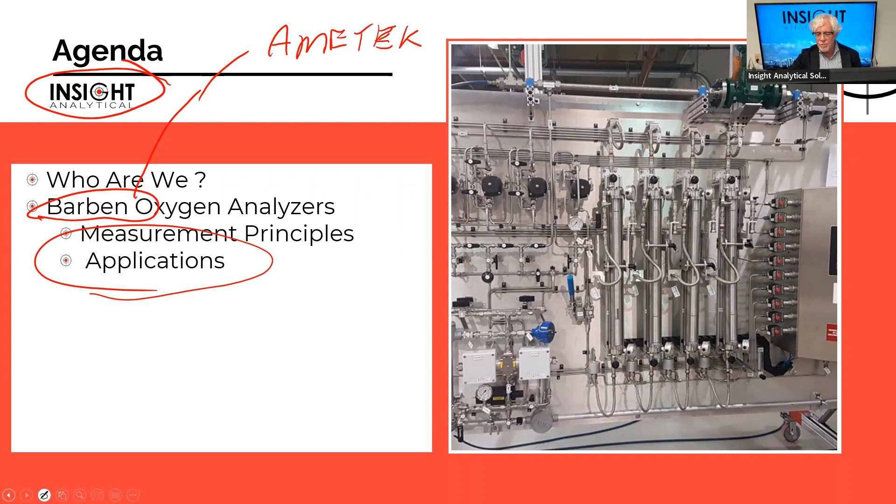Insight is a Calgary-based systems integrator and distributor. Our shop is in the northeast of Calgary. We co-locate with the local Swagelok distributorship, which leaves us a very large manufacturing floor available. We have about 20,000 square feet of accessible manufacturing space, lots of big doors, and a big 10-ton overhead crane. We can bring a full analyzer building in.

We are AB 83 compliant fabricators. For the Canadians here, AB 83 is important because it means we can manufacture systems that meet the required pressure vessel codes for installation and process applications. It's a specific set of regulations, kind of similar to the European pressure equipment directive. We've done projects with CRN for Alberta, British Columbia, Ontario, and Saskatchewan.

A lot of the people here have worked with this at other companies. We bring a lot of history, even though Insight's only been around since the start of 2016, late 2015. A lot of us have worked together for 10, 20, 30 years. So we've got a really strong team with good documentation resources, drafting and design, and engineering design resources. We have journeyman electricians, journeyman instrument people on staff, and full factory acceptance testing here in Calgary.

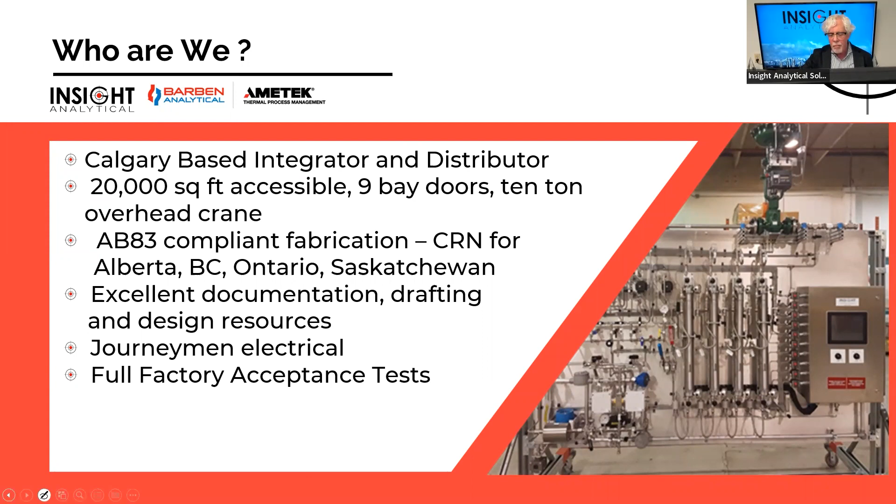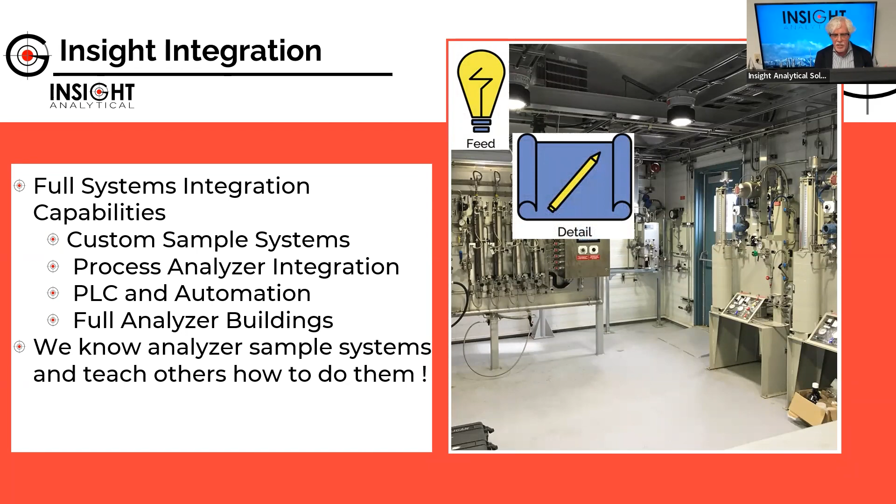From the systems integration side, we'll work on projects - no project too big or too small. We'll do things from just custom sample systems through full process analyzer integration. We'll add in any necessary PLCs and automation needed. We will do full analyzer buildings and shelters. We'll work on projects right from the front-end engineering design side, helping to specify the appropriate analyzers for a given application through to detail engineering, design, and fabrication.

So we'll build everything here in Calgary, integrate an entire system here in Calgary, and do full field commissioning. And of course, we try to service all the product that we sell.

Some of you may know me from teaching other sample system courses. I used to teach courses internationally on designing analyzer sample systems. It's one of the things we like to believe we excel at - trying to put the right sample system in for the right application.

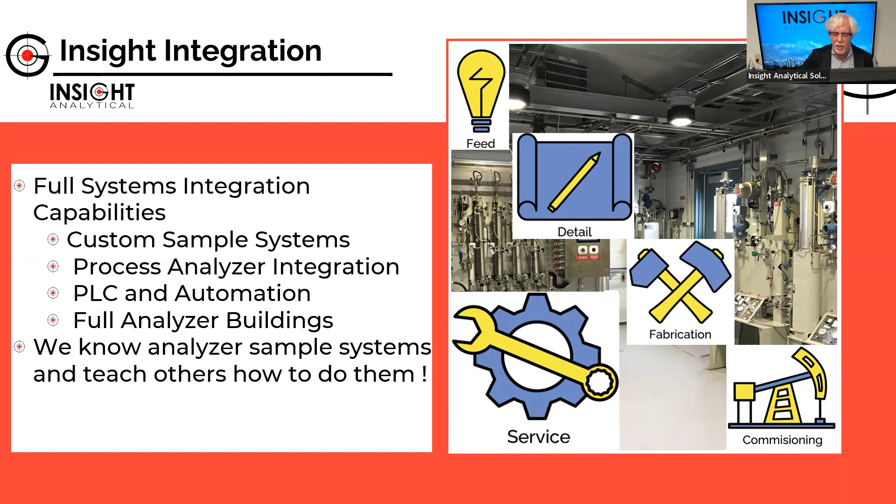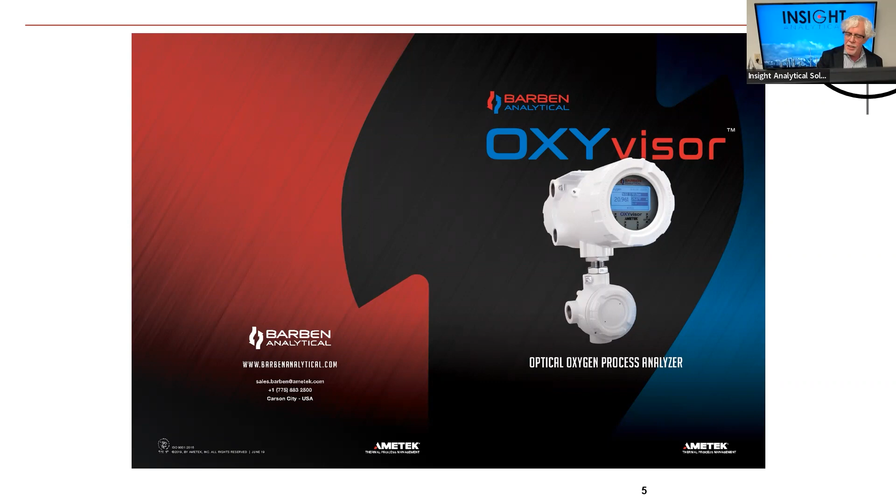So the product we're going to talk about mostly today is the Barben OXYvisor. This used to be the Barben 4401. The OXYvisor came out a couple of years ago. It's a very nicely engineered packaged product, with a nice little touchscreen display, which is great in an explosion-proof device. It's got some great features, so we're going to talk a little bit about the analyzer, how it works, and then some of the applications we use it in.

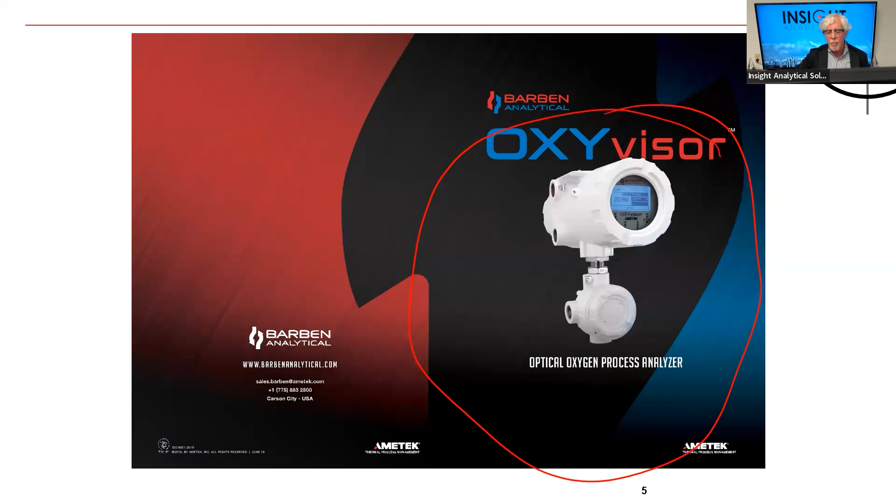Initially, I'm going to talk a little bit about why do we even bother? I always tell people nobody puts analyzers in because they really like them. They're expensive, they take maintenance, so we have to always understand why we really want to make this measurement. With oxygen, it's one of the most ubiquitous measurements we have - we see it in almost every industry.

Oxygen can be extremely corrosive. In things like boiler feed waters, it can be very corrosive. In pipelines, it can cause corrosion or contribute to corrosion. So it can attack our customers' assets, whether it's piping or metallurgy. It can cause corrosion issues in gas phase, liquid phase, or steam type applications.

It's also important from a process efficiency perspective. If we get oxygen into certain operating vessels, like amine units where we're doing H2S and CO2 removal, the oxygen can contribute again to corrosion and the formation of things like heat stable salts that affect facility operations. It's also important for its ability to attack and damage catalysts, so it can matter when we're looking at product quality, like in methanol and ethanol production.

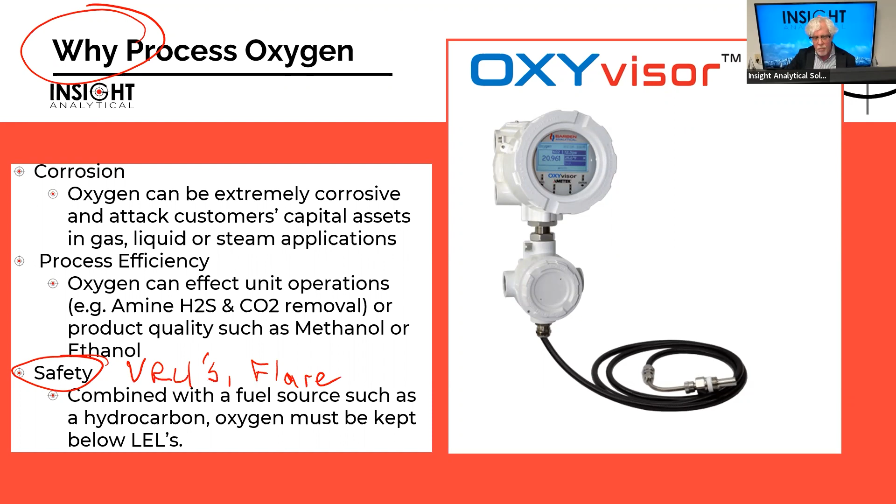So the Barben oxygen analyzer, the guy we're showing up here, is an interesting device. Again, my background, I'm a spectroscopist by trade, so a lot of the products that Insight has come to be selling are often based somehow on spectroscopy.

Or the use of light to be able to make these kinds of measurements. The Barben oxygen analyzer, people refer to it as O2 fluorescence or luminescence, a luminescence-based technology.

So it's based on light. It's going to actually use a beam of light to interrogate a sample and determine how much oxygen is there. I'll talk a bit more about the fundamentals of that optical piece on the next slide.

Some of the key features it has is it allows us to measure oxygen concentrations in gases or in liquid phase. So we can use the same technology for doing a boiler feed water application as, let's say, a vapor recovery unit application. It's got this great little touchscreen HMI that allows us to interact with the analyzer.

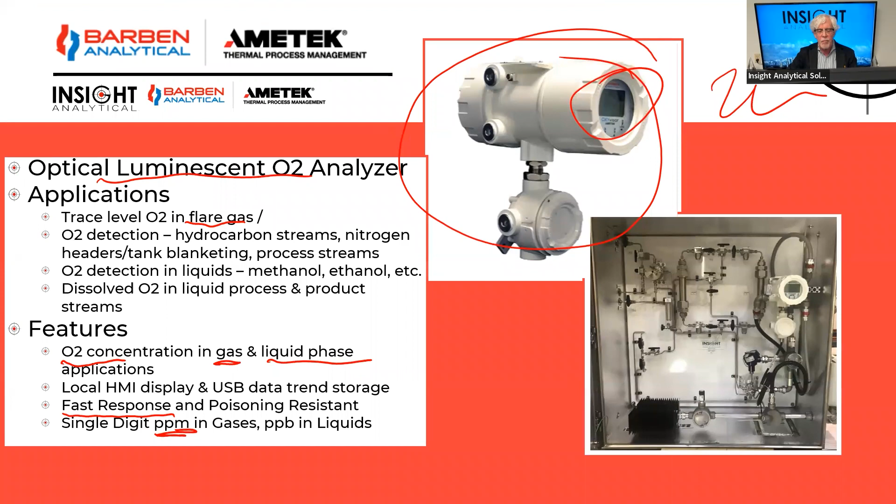So the methodology is based on something we refer to as fluorescence quenching. You can think about the word quenching, we talk about quenching a flame or something like that. We're talking about getting rid of some of the energy, pulling the energy away, and this is what happens in fluorescence quenching.

We send a beam of light down a fiber optic. The beam that we send out, using a blue LED or a blue light, we send it down a fiber optic. The beam of light hits a surface that has a specific chemical doped into it, a ruthenium chloride surface, a ruthenium complex - it's a hydrocarbon ruthenium complex. Ruthenium is one of the rare earth metals.

This chemical has a unique property that when blue light hits it, it glows red. So the blue light hits it and it gives off red light, which goes back up the fiber optic. And we can have a detector there to watch how much red light gets generated.

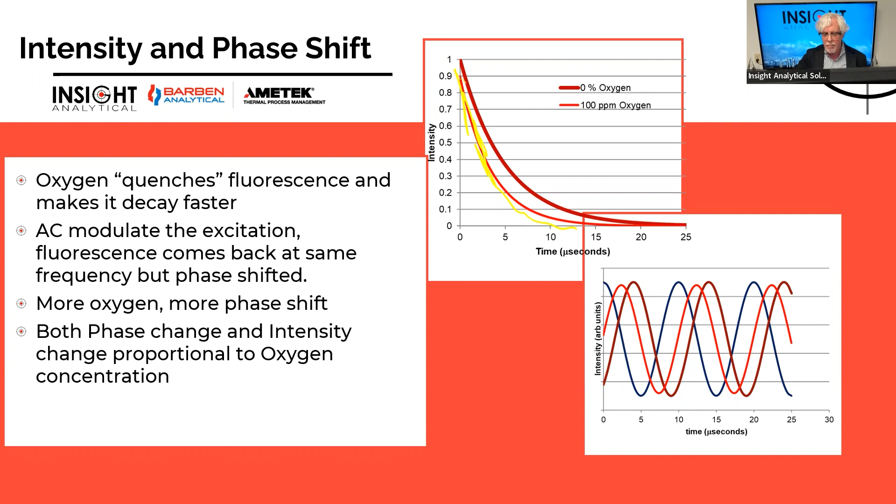So the analyzer itself comes with a lot of features. From a hardware perspective, it comes in a packaged device that can be class 1 zone 1, class 1 div 2, or an ATEX zone 1 version. So we have this explosion-proof box that houses the spectrometer. We have a full touchscreen front display that lets us access all of the settings for the analyzer without opening the box. We have a place to bring in electrical connections and our fiber optic connection going out.

So in this case, we see the fiber optic connection over here, and wherever that fiber is touching is where we can do the oxygen measurement.

While we use things like this in process applications, medical researchers use a very similar technology because they can put a thin, tiny fiber optic right inside of an individual cell and use it to map concentrations of chemicals like oxygen inside the cell.

So the analyzer comes packaged for appropriate electrical area classifications, has a full user interface, and a wide temperature range it can operate under, so it's suitable for indoor and outdoor installations. In some climates, not outdoor in Canada - typically in Canada we'll put it inside of at least a temperature controlled enclosure.

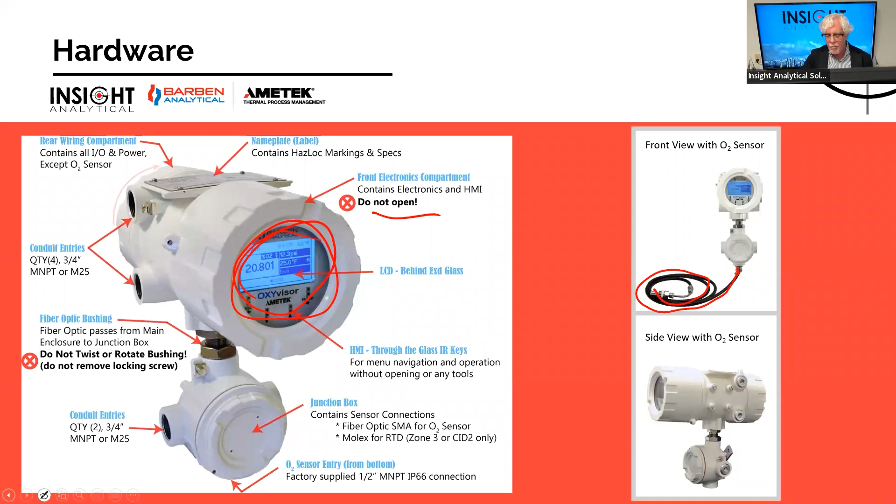Some of the advantages of this technology, as I mentioned before, are very long-term stability and low drift. So we can make accurate measurements down at very low concentrations, down to about 1 part per billion aqueous, 0.5 part per million in the gas phase.

The measurements aren't flow rate sensitive, so we don't have to put a lot of effort into making sure we've carefully controlled the flow rates over the analyzer. The measurement is very specific, so it doesn't get interference or have problems with other chemicals being present. Things like carbon dioxide, H2S, sulfur dioxide, changes in pH in liquids, changes in chloride concentration - none of those things affect the analyzer's ability to measure oxygen. So we can use it in corrosive streams with high concentrations of H2S, and in aqueous streams with contamination like metal contamination, and still get good oxygen measurements.

Like I mentioned, it has hazardous area approvals and doesn't need a lot of sample conditioning. A lot of oxygen analyzers, if you take one measuring parts per million and expose it to air, it'll have a very difficult time getting down to reading low concentrations again. This one responds extremely quickly to large changes in concentration. I used to run it with a sensor in a T, pull the sensor out, expose it to room air so the detector is completely saturated with oxygen, put it back in the T fitting, and within a minute or two we'd be down to reading parts per million again.

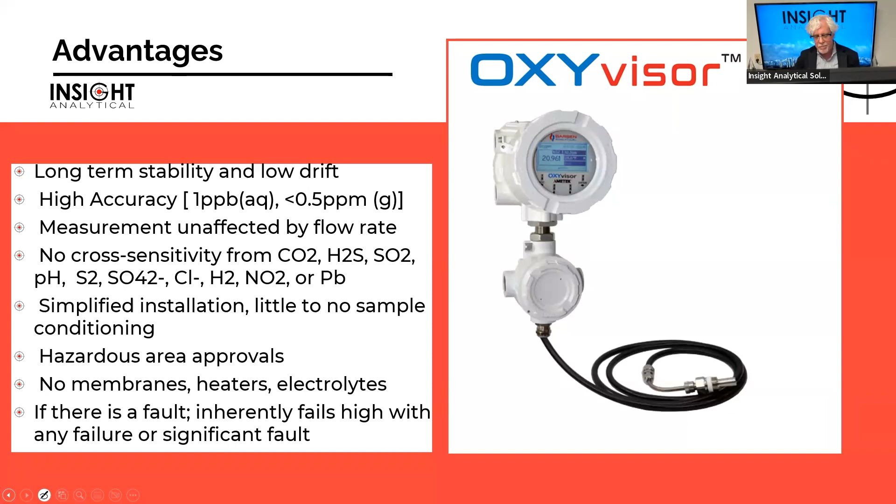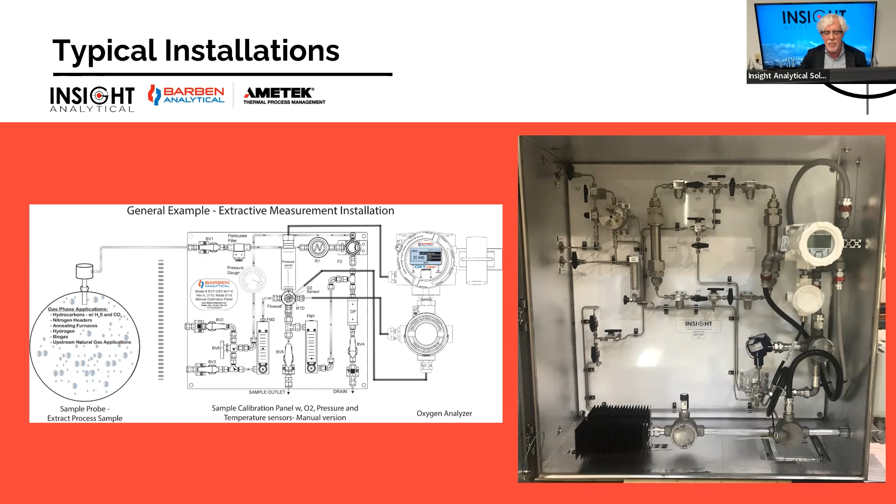So a typical gas phase installation is probably going to include things like this—let me zoom in on this flow panel for a second. There'll usually be flow meters to control flow rate to the cell and calibration flow rates, low point drains or bypasses if necessary. But it's a fairly simple sample conditioning panel.

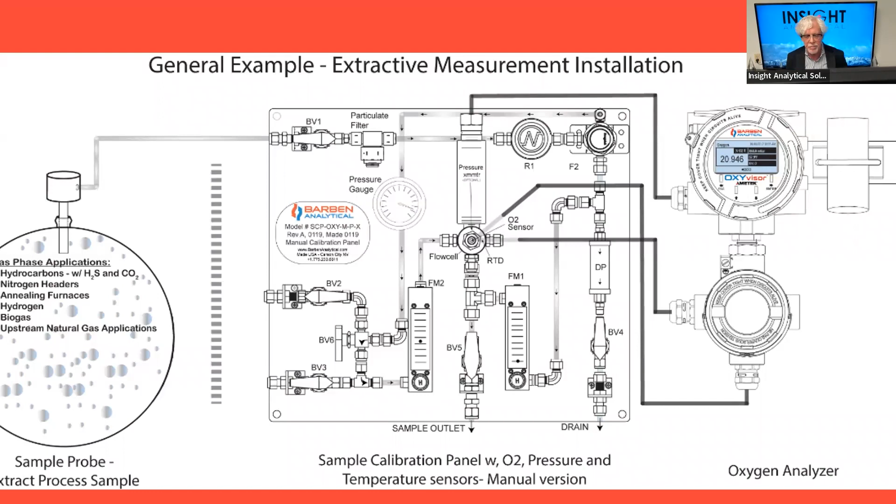We've got a sample of one sort sitting over here. There's the Barben OXYvisor in the corner—can't draw when it's like that. See the Barben OXYvisor in one corner of the cabinet. Again we've got some flow meters, some filtration, and because it was for Canada, it all sits inside a small heated enclosure.

On the natural gas processing side, there are a lot of places where we will potentially be interested in putting in an oxygen measurement. Because it impacts corrosion, we may want to put oxygen measurements near the wellhead before compression, so we measure oxygen at compressor inlets. It's also very common to want an oxygen measurement at the compressor outlet. That measurement lets us know, did I develop a leak in my compressor? If I've got upstream leaks through the compressor, or leaks in the compressor, I'm going to end up mixing oxygen with my natural gas.

Oxygen mixed with natural gas is obviously a combustible mixture, so I've created an explosion risk, but I've also potentially created problems for some of my downstream processing units, especially on the gas sweetening side. We generally want to make sure that if we're going into something like an amine unit, we don't have any excess oxygen there. So we want to know we're not getting oxygen into the system from the compression side, because if it gets into that amine unit, it's going to cause problems with fouling and heat stable salt formation.

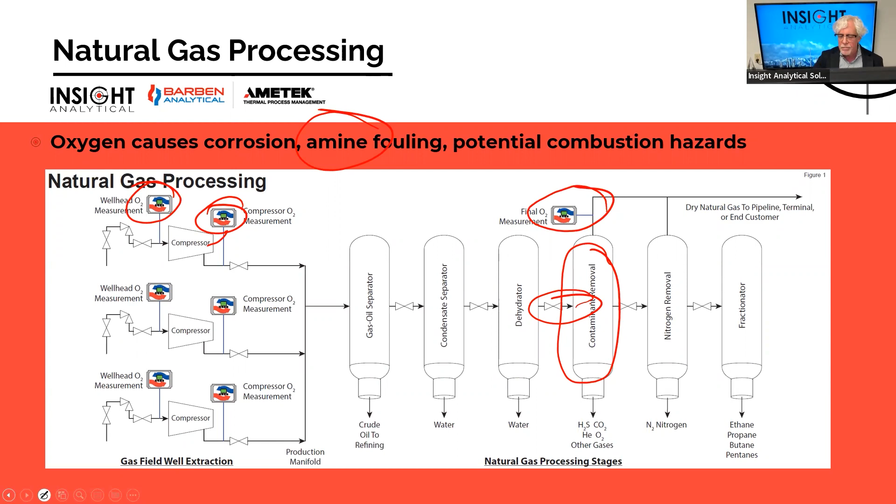We'll often put in vapor recovery units at gas processing facilities, at refineries, at crude oil batteries—any place where we have hydrocarbons present in tankage. So if I have big vessels like condensate stabilizer vessels, or tanks where I'm storing crude oil, it's very common for us to take the vapor that comes off the top of those tanks and recompress it for some other application. It might go back into a gas processing facility for producing more natural gas, or we might use that vapor as fuel gas.

In some cases, we will blanket the tank with something like nitrogen to try to make sure we don't have a combustible mixture up there. So in all of those applications, we end up wanting to know, am I letting any oxygen get in? Because it's corrosive and it's flammable. So almost any tank blanketing or storage application has a potential for looking for oxygen in that overhead gas that may be going to a vapor recovery unit.

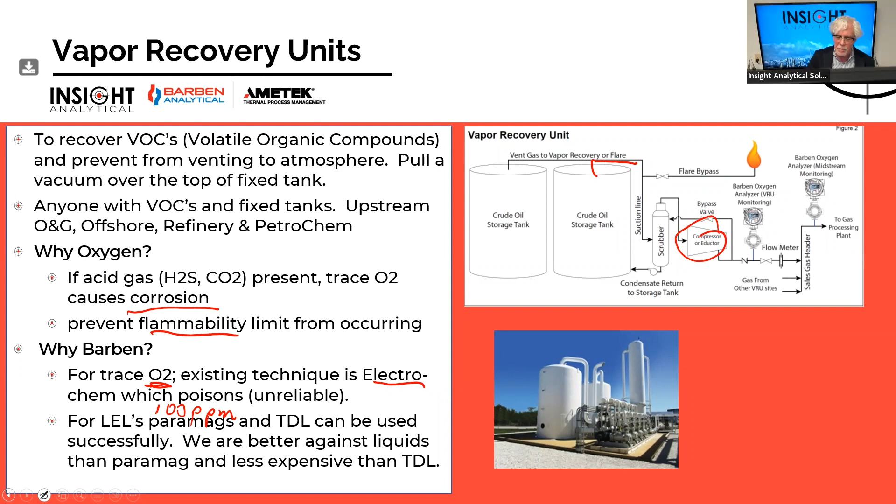Carbon sequestration is very important these days. Everybody likes to talk about carbon dioxide and greenhouse gas emissions. One of the ways we are addressing that from the oil and gas industry is to capture the carbon, so we do that often by running the gas over something like an amine unit.

Going back to what I said on previous slides, if we're going to do carbon sequestration, we'll often have some source of carbon dioxide gas, have a pump or compressor to pressurize it. We don't want to let oxygen get in at that compression stage, then run that over an amine unit, absorb the carbon dioxide, and re-inject that carbon dioxide back under the ground. It's important we don't inject oxygen back under the ground as well.

The places we do these injections into, underground caverns and things like that, there's bacteria there that are generally called anaerobic bacteria. They don't want oxygen. When they get oxygen, they start to make a lot more nasty chemicals. So we like to try to keep our injection wells from having excess oxygen in there. It becomes important because we need to protect the amine unit from oxygen, and we also don't want to inject oxygen back down into these underground caverns.

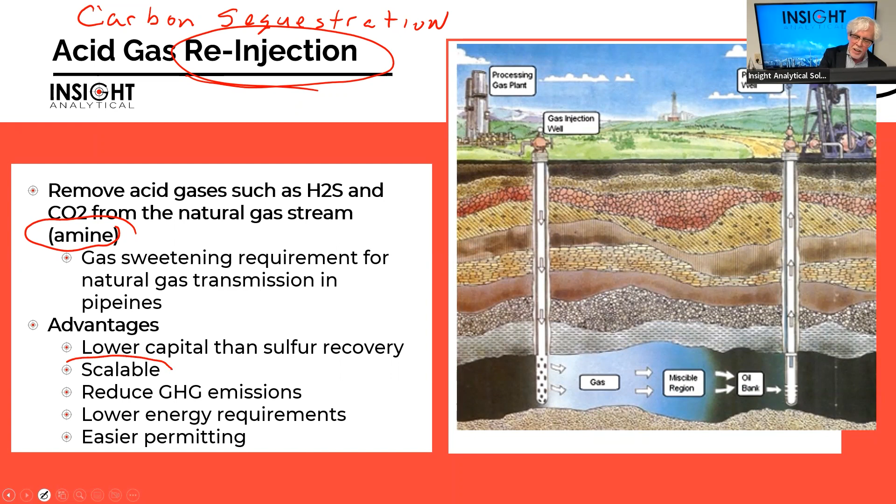Acid gas re-injection has a lot of advantages because it's a very scalable technology. We can make it really big. When we talk about things like H2S, it's less expensive than building a sulfur recovery plant, and it emits less to the atmosphere. It gives us a way to reduce greenhouse gas emissions and has fairly low energy requirements compared to some of the other ways to try to reduce CO2. It's easier to permit here in Alberta as well.

And so the Barben oxygen analyzers are especially useful here because they don't get poisoned by H2S and CO2. They can handle liquid carryover in case we have problems hitting dew points at the compressor, and it allows us to measure the oxygen in both the inlet compression stages and after the amine unit.

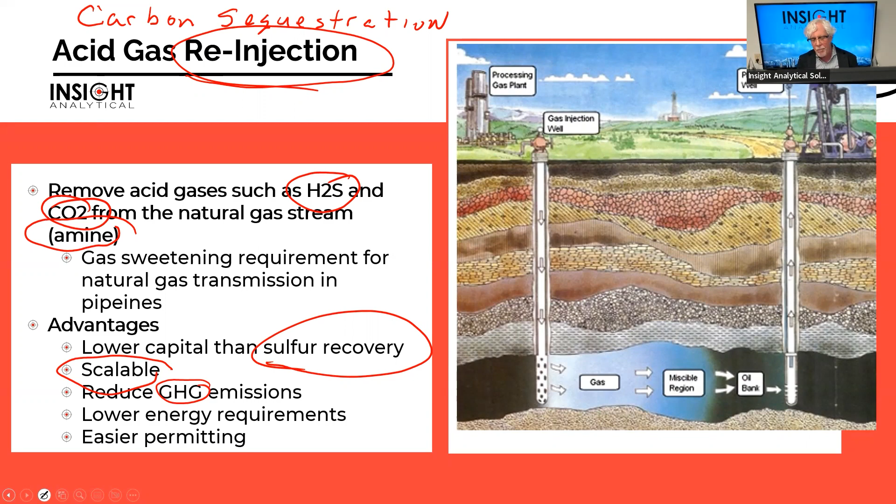If we look at the process involved, we usually start out with some sour gas, perhaps it has H2S in it. We produce sweet gas, this might be natural gas. We take the acid gas that was made during that sweetening and we have to compress it. We want to know there's not too much oxygen in here, because when we compress it, if we get things condensing, it's a wet stream, we'll have corrosion.

We'll have to dehydrate that gas as we compress it, and that dehydrator doesn't want to see oxygen either. Then we pump and compress that up and push it by pipeline and put it to the injection well. There's over 25 major acid gas reinjection projects going on in Alberta right now, and all of these have to be concerned: what's going to be the impact if I have oxygen? Because it can affect my compression stages, my sweetening stages, my dehydration stages, and the place that we're pushing that oxygen back down into.

So again, we have the same issues with reliability on some of the other technologies like electrochems, and the fact that we can measure at very low levels with the Barben. It's a very advantageous way to measure low levels, which tells us sooner that we have a leak in our compression stages.

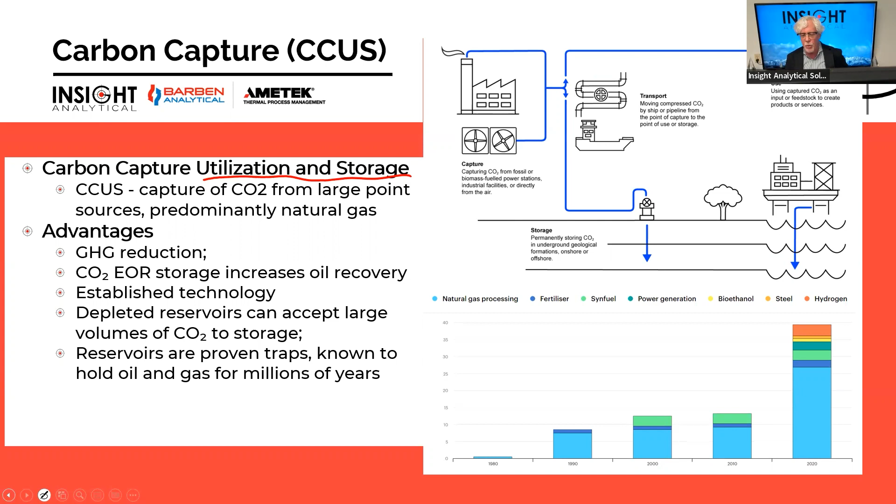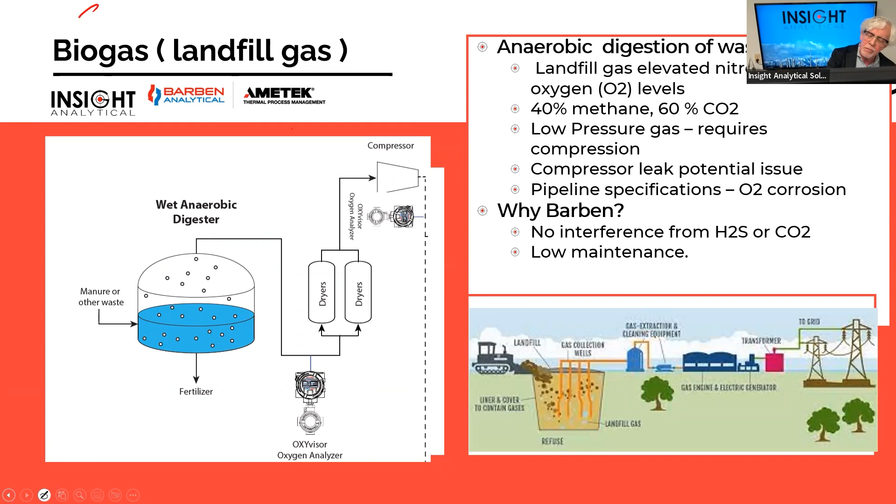Another place that oxygen measurement is extremely important - again, this is going back onto this green energy side of things. You'll hear a lot of people use the phrase renewable natural gas. And this is natural gas that's produced from some kind of a fermentation or digestion kind of process, but then is used in the same way as we typically use natural gas. Or I suppose it could be used to make hydrogen as well.

But the important thing here is that this is methane that's being produced from a renewable means, often by digesters of things like fertilizer or manure, other kinds of chemical wastes, or it can be landfills where, if we go to a local garbage dump, all the hydrocarbons that are underground are slowly decomposing and they produce methane over time. And so we're beginning to use this as a source of natural gas that doesn't require drilling wells.

It's big in Europe. It's becoming big in the US. These are low pressure gas production though. When we get natural gas from underground, it's at very high pressures. When we get it from these digester facilities, it's at low pressures. So for us to put it into a pipeline, we're going to have to put compressors in and pressurize this stuff up. And so we have to look at how much oxygen is coming out with the actual gas we're producing and how much is there after compression. And so we want to make sure that we meet the pipeline specifications to prevent corrosion.

So again, the Barben is advantageous here because there's often other byproducts, especially H2S, CO2 that comes from these fermenters, that doesn't attack the sensor - it's very low maintenance. These facilities don't produce a lot of gas, so we have to have a cost-effective and low maintenance solution.

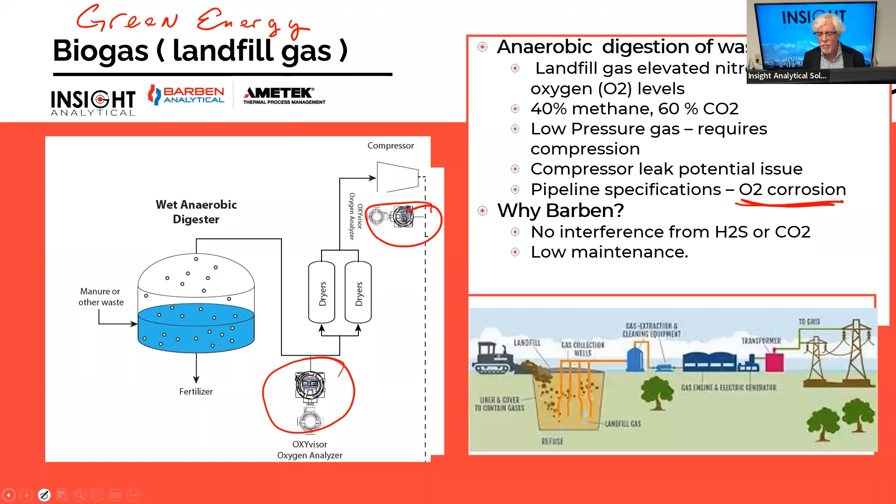I kind of wanted to focus this presentation on gas phase applications, but as I mentioned at the beginning, we can use this to do oxygen concentrations in liquids as well.

A common place for these is any place where people are using some kind of steam boiler, whether it's steam assisted gravity drainage in Fort McMurray or using steam to drive a turbine. They always want to be sure that feed water has very low levels of oxygen, often down as low as the parts per billion range, using special chemical injection to get rid of excess oxygen, because dissolved oxygen, especially in high temperature water or steam, is very corrosive and can attack the piping and cause leaks. So it's critical to monitor dissolved oxygen when running a high pressure steam boiler.

It's a scaling problem. It causes more corrosion, builds up scale, reduces heat transfer, and eventually can cause the pipes to start to leak. Even low levels of it can be very damaging. We're talking about concerns down in the 10 part per billion range and less.

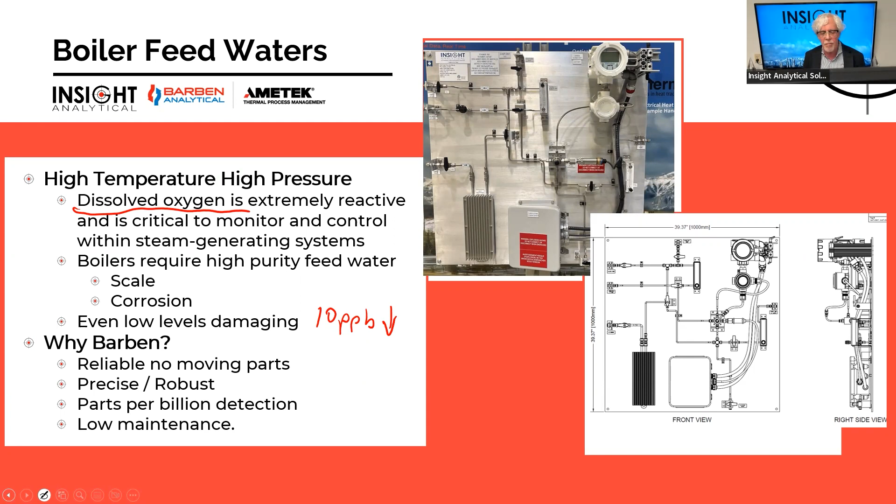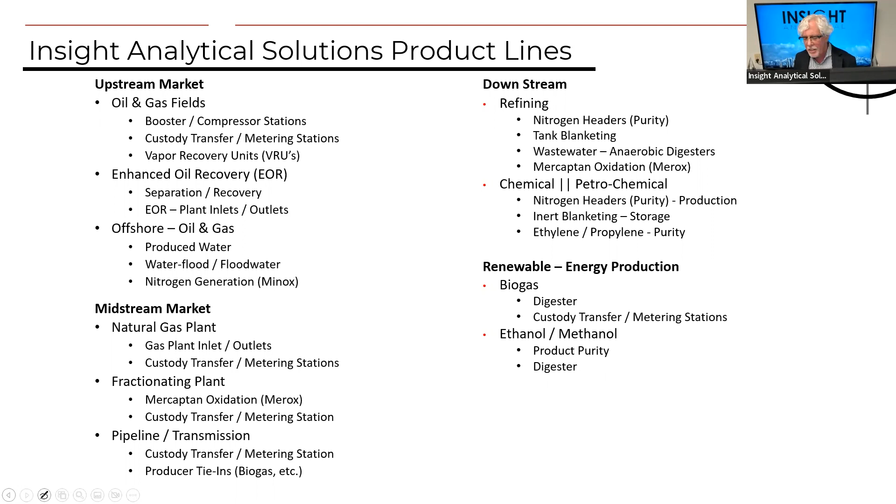Insight, while a lot of people know us for the JP3 measurements and the work we do in gas plants, we represent a full line of products that allows us to do measurements in both the gas and liquid phase. I'd like to give you an idea of all the products we carry. Our next webinar in February is going to be on the JP3s.

And... my pen stopped writing there for a second. And then the Extrel mass spectrometer, I think, was going to be our webinar in March. It'll be March 16, I think. And Jaden, was it Feb 16 for this one? Jaden's probably not listening. All right, there he is, probably handling the link. Yeah, sorry. Was it Feb... which one were you asking? Was it Feb 16 for the JP3? The 23rd. The 23rd.

And the Extrel webinar we're going to do is going to have a big focus again on carbon capture. But we've also just recently been doing a project on helium. People may have heard that helium's in a real shortage, so a lot of people are looking at helium plants. Things like mass spectrometers are really good for purity type applications.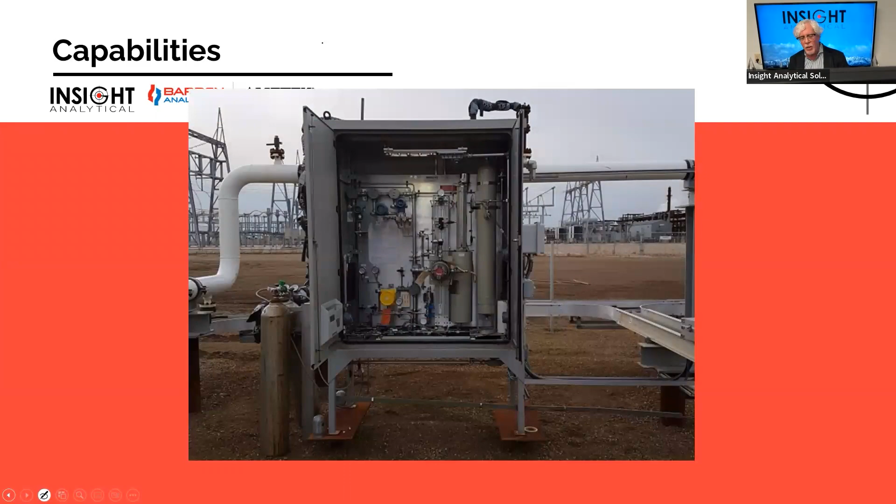From a capabilities perspective, I like to show some of the jobs we've integrated. We'll build everything from composite samplers through to another composite sampler on pipeline, through analyzer sample systems, automated grab sampling panels, full shelter integration for analyzers, and PLC automation.

We're very open to looking at projects. We're pretty good at knowing what's in our wheelhouse and what we're good at doing, and we love to bid those kinds of jobs. If we can't do it, or we don't sell a product that's going to do it, we're also good at knowing who can, and we'll refer you to those people.